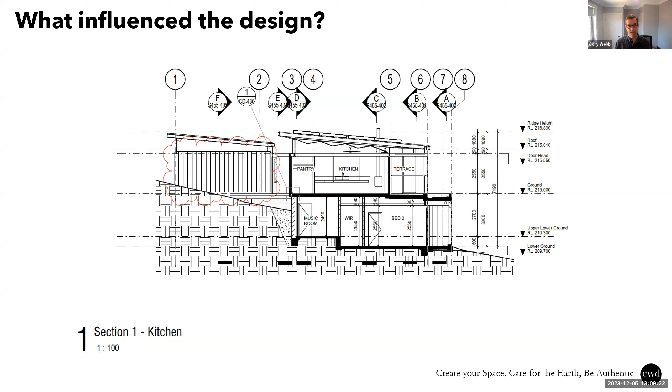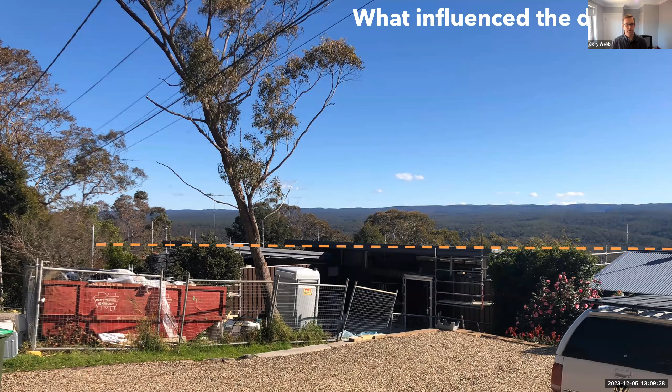There were also some planning overlays we had to contend with: a 5.5 meter height limit, and view sharing for properties across the road. Also, to fit into the context, council wanted us—and we also wanted—to make sure the house fit in the street well, so there was ability to have a good rhythm of form through the street as well.

We've used a couple of mechanisms to control that, which we'll go through in more close-up shots. Basically, I've got an oversized colonnade on the lower level with little decks and recessed doors, and then upstairs an oversized eave and pergola to give that solar protection in those areas.

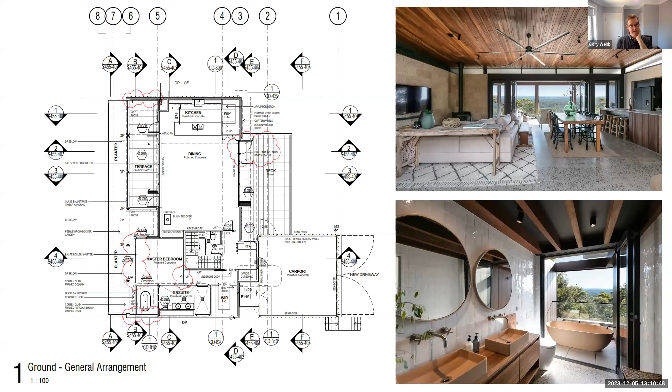In layout, we've got the entry level, or that upper ground level, that you enter through on that deck. There's a little bridge that runs over to this deck, through the front door and into the kitchen, living, dining space, with views through.

The client was really keen on having an outdoor bath, so we incorporated a sliding folding door between the ensuite and the outdoor bath, so you could fully open that ensuite up and enjoy the views out there. We really wanted to bring natural biophilic materials—timber and stone—throughout the design as well.

Downstairs, again we had the bedrooms running along this face, so they can all take advantage of the views. This image is from the guest bedroom, looking out over the pool area and the bush in the background.

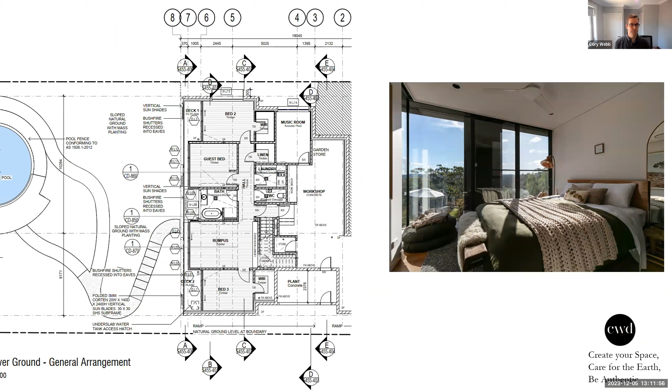In terms of style, the client really wanted something that would fit in with the natural context of the site, where the topography was sloping away from us down the site.

So we designed the house roof to have that same sort of form, so it would be synchronized with the topography and fold like a page of a book, letting in a lot of that early morning light into the main living space.

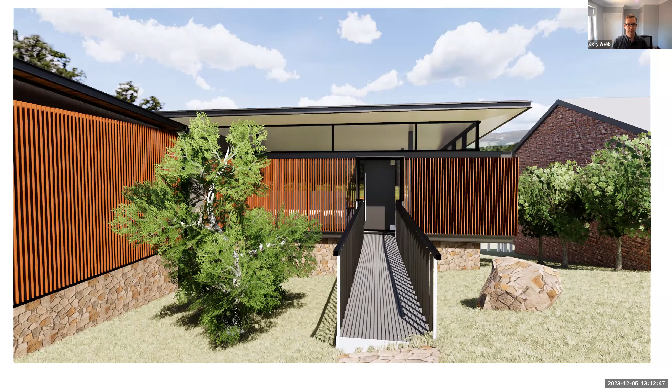In terms of materiality, we wanted the context of the forest and the stone to be reflected in the corten and stone base cladding. The finished product had these corten and sandstone finishes, so it would age gracefully.

We were also able to design the facade to fully open up on both the front and back of the house, so you could have the benefits of ventilation through there in good weather, and also generously shared that view with passersby on this quiet road. So it was quite an open house, but with very good access to views and the like.

As we said when we were looking at the topography, the form was designed to be partly submerged, and then this dominant upper level, which was really just at ground level, would look like the main thing, the main show. The roof was designed to really float above, able to capture a lot of light and warmth through the day with the amount of glass in there, connecting it with the bush as well. So that's a bit of the thinking behind the design and material choices. But now we'll dive into the bushfire design strategies.

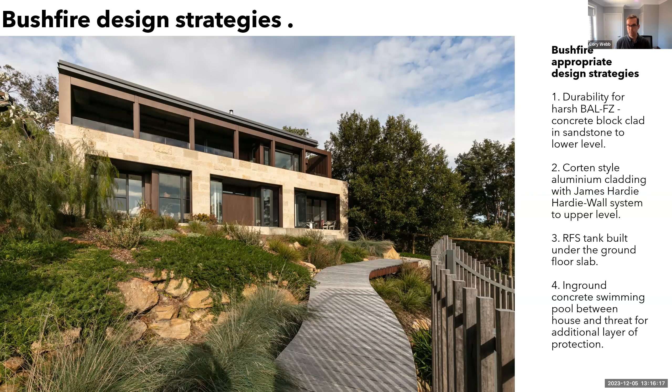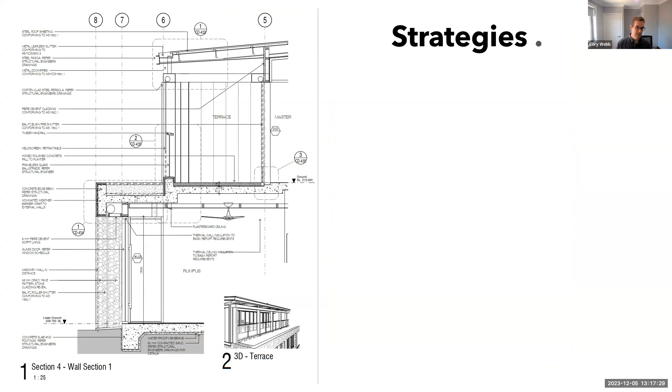In a more technical wall section through that area, you can see on the terrace level above, we boxed out this Corten pergola and had the bushfire shutters sitting inside that. Then down on the lower level, you can see the section through where the bushfire shutters are sitting in the soffit underneath the first floor slab.

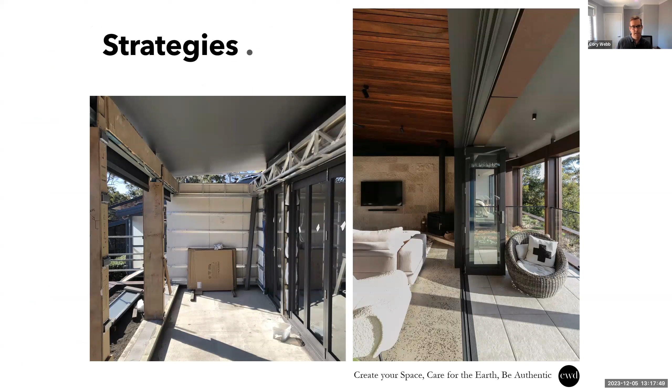So during construction, what did that look like? We had the shutters all framed up and the pergola all framed up - that's the left image - and then on the right, all clad with the aluminium Corten style cladding. Then construction shots for the soffit, where you can see the bushfire shutters have been fixed down the side of the slab, and that was concealed with fibre cement.

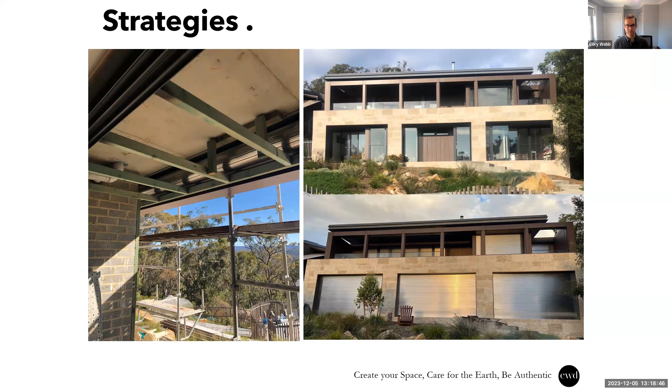One strategy to minimize costs for the client on this build was - instead of having on the lower ground level 8 different windows, some butt glass windows which are normally pretty difficult to do in flame zone, with little decks or terraces along there - instead of having individual shutters for each of those, we went for more bang for the buck and put the shutters out at the front face of that colonnade. That way we could reduce the number of bushfire shutters by 5. For the big ones, they're roughly 5 to 10 grand, so a significant cost saving there.

The roof construction we deliberately kept very simple, because complicated roof forms are very challenging in flame zone. So we've got just 2 single skillion roofs over the upper sections and some lower ones over the ensuite and kitchen.

For the construction, we used the Promatec BAL FZ tested system for the roof construction, and this has recently been bought out by, I think it's Siniat, with the weather defense product - Promat's sold it on to them. This is a really good system because the Promat, or weather defense at Siniat now, is vapor permeable and tested for BAL flame zone, so it reduced the risk of condensation, which there's been a bit of discussion about in the industry.

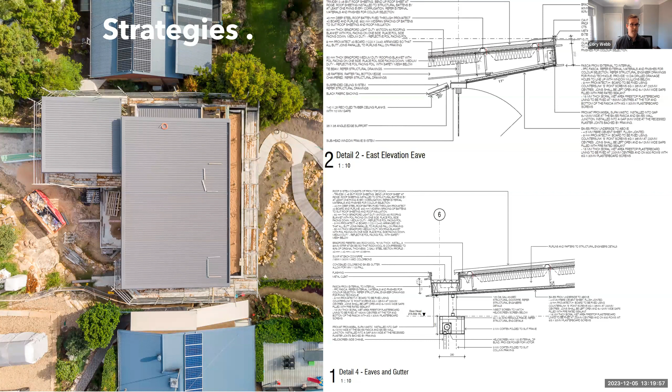Just in terms of that comment, for the condensation issues that can occur, specifically to flame zone Appendix H roofs, quite a bit of moisture can be trapped in the roof, as we can see in that top roof. I didn't use it on this system, but on all projects going forward, we're using that best practice system down the bottom with a ventilated sarking zone to allow the air to flow out. That's possible with the detail that Mark Davis has shared with the BDAA.

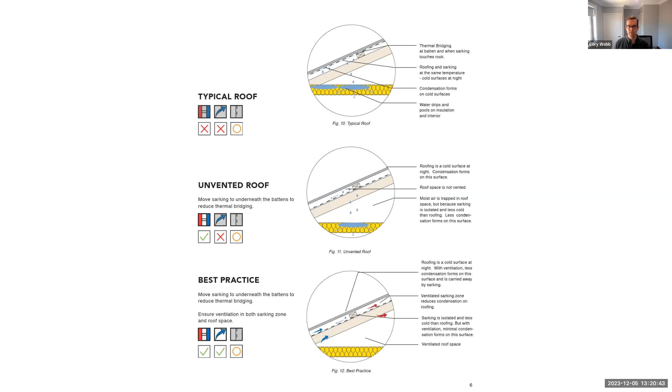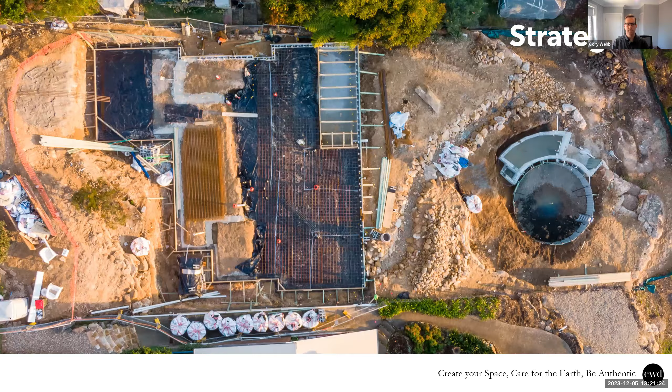For the landscape design, we designed the property to have non-combustible landscaping elements within 6 meters of the house. We've got concrete steps at the back, and around the pool, for less necessary paths we were able to change it over to timber. There was a dry creek bed in the backyard, able to filter the stormwater from the roof.

And then through a system there to filter it all out. We also used a lot of very low native planting, so that there isn't fire sources right next to the building. That was an important part of it, and at a recent bushfire conference it was drummed into everyone to pass on: instead of putting plants against your buildings in bushfire areas, encourage everybody to have a non-combustible path basically around your house.

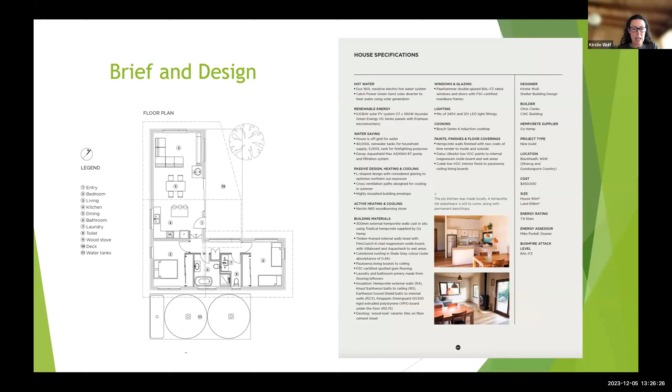It's in a very high bushfire area. And the brief was for a small house, solar passive, high insulation, using natural materials as much as possible. Unfortunately, north is sort of to the front corner, and that's how we've sort of ended up with an L-shaped design with a deck which can capture the sun in winter.

So in terms of that, having a look at it, what is hempcrete? So not a lot of people have come across this, and it's really a fantastic material to use in high bushfire areas, and for many other reasons, but one of them is it's non-combustible. But basically what it is, it's made from the hemp hurds which are the inside of the hemp stalk, and it's mixed together with a lime-based binder. It's usually poured into a formwork on site, although you can now get hemp blocks, and they also could do spray installation. It is non-load bearing, so inside the middle of the wall there is actually a timber frame. We'll have a look at that.

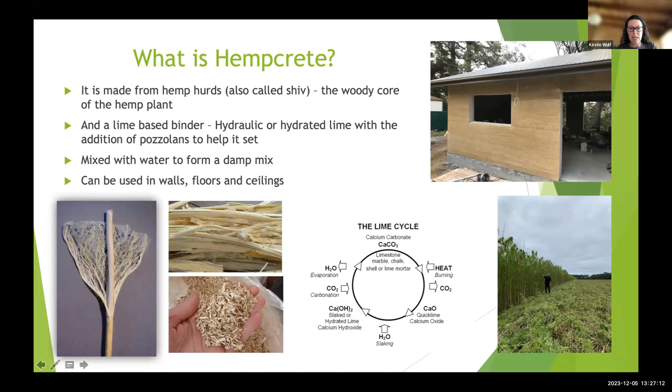But in terms of that, where did hempcrete come from? Basically, it started in France in the late 1980s, where they were wanting to retrofit these wonderful half-timbered houses from the 15th and 16th century. Now, when they used non-vapor permeable materials like concrete, they actually came up with problems of the buildings rotting. But they also needed to try and bring these buildings up to European thermal standards, and needed a material that was well insulating, but was also vapor permeable.

Why didn't we build in Australia with it earlier? Well, part of the reason is that it wasn't legal to grow hemp. New South Wales was one of the first states in Australia, and in 2008 it became legal to grow industrial hemp. You might wonder what the difference between industrial hemp and marijuana is: industrial hemp has a low THC content, and that actually needs to be measured. So there are no psychoactive properties in the industrial hemp.

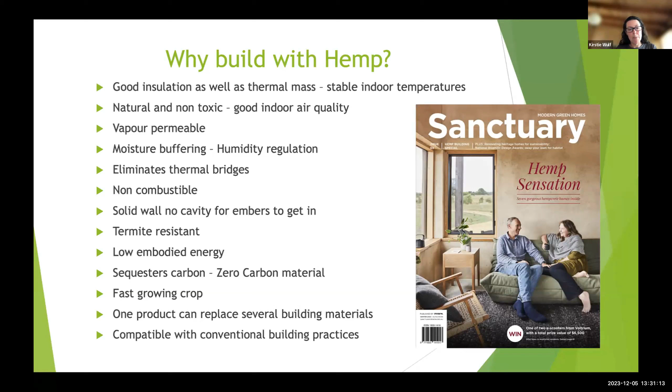So also, hemp is a very fast growing crop, growing in 3 to 4 months. Compare that to even the fastest growing timbers taking 20 to 25 years. So what that means is that the carbon which is in that material can be locked up in that material, and then once it's in your wall, it stays there. So even taking into account the energy and CO2 in the lime-based binder, it's actually a zero carbon building material, also very low in embodied energy. So a couple other great things: it's quite compatible with conventional building practices, a lot more so than many of the other natural building products.

The hemp is then mixed in a flat pan mixer with water and a lime-based binder, placed into the formwork. It is tamped down. It is not rammed down, because you don't want to push all the air out. You just want to have the particles interlocked with each other so that they hold in place.

The other great thing from a construction point of view is that all the services are put in the walls first prior to the pouring of the hemp, which makes it quite easy, although you need to make sure that you have a good electrical and plumbing plan so you know where everything's going to go.

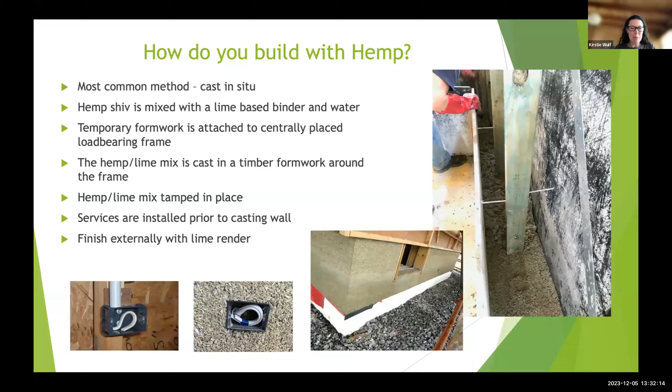So at the property at Blackheath, the owners actually cast the walls themselves. So here they are working on the site. The big green thing is the mixer where it was all mixed up. They also did some fantastic details. They wanted the thick walls, which in this case are 300 thick, and that was largely for better insulation because Blackheath is quite a cold area.

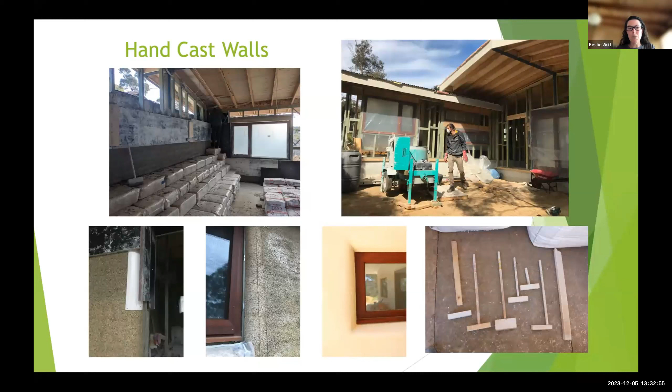But they did this wonderful curved formwork around the windows using quarter plumbing pipe, which you can see when it was rendered gives a really lovely finish there.

So on the Blackheath house, the hempcrete was installed what they call cast in situ, but hempcrete can also be used as hemp blocks. So they're preformed and are effectively glued together. You still need a structural frame for that, whether that frame is timber, steel or concrete. Also, hempcrete can be spray installed for faster installation.

Popular in Europe is also hemp insulation batts. We're not manufacturing those here in Australia, but there are a number of companies working on that. So hopefully we will have that product available in the future.

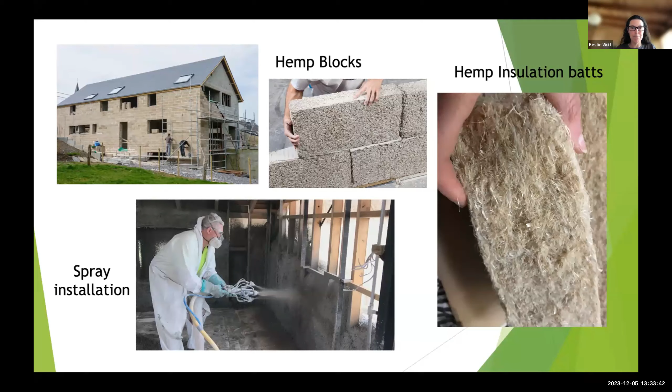So in terms of the hempcrete wall construction, as I described earlier, the frame is located in the middle of the wall, which is great, protecting your frame from both fire and termites. And then on the outside, there is usually a render finish. Those renders need to be vapor permeable because the wall is vapor permeable. On the inside, you can either leave it unrendered and finish it with a vapor permeable finish, or you can also render it on the inside with either clay or lime.

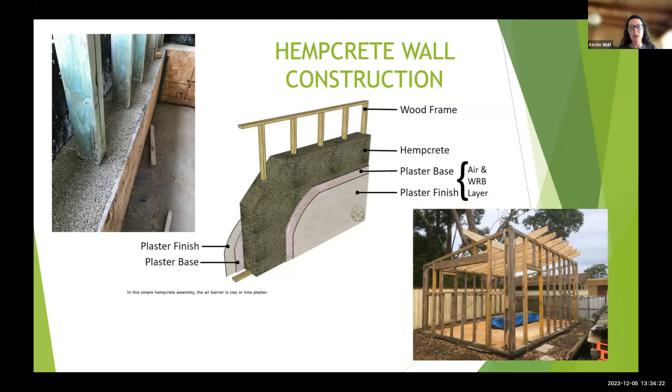So there are a number of products on the Australian market. I've just picked out two of the more popular ones and looked at what they have done in terms of their fire testing. So the first one is the Tradical hempcrete, which is distributed in Australia by Oz Hemp. A 300mm thick wall will get you a 60-minute fire rating, which is more than enough for BAL-FZ. BAL-FZ only requires a 30-minute fire rating, and they have that CodeMark certified, so that can be used for BAL-FZ.

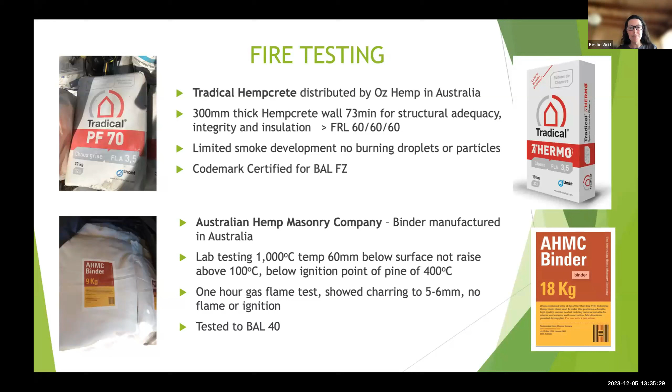The Australian Hemp Masonry Company, that is a binder that's manufactured in Australia. They've only had theirs tested to BAL-40 so far, but I have no doubt that when they do test it for BAL-FZ it will comply, because certainly the hempcrete can withstand significant temperatures without either igniting or spreading any fire.

So during my own half-hour fire test on a hempcrete block, and it was an unrendered block, because if you render it, it gives it even more fire protection, there was absolutely no flaming. It certainly did have some charring of the outside, but even at the end of that test, I could put my hand behind that 100mm hempcrete block and only feel a tiny bit of warmth.

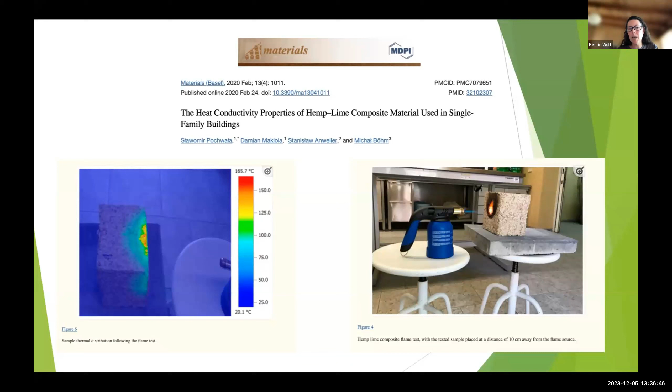And that's one of the real benefits of hempcrete. Not only is it non-combustible, but it provides you really good insulation if you are in a bushfire situation, because you need to be protected not just from fire ignition, but also from that radiant heat.

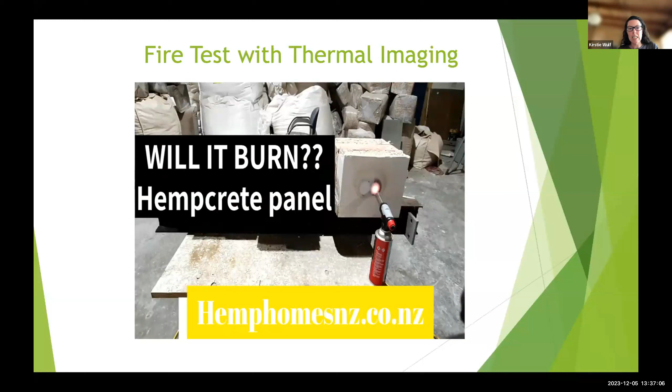Let's see if this video will work. Oh, here we go. It's only quick. The relevant thing I wanted to show in relation to this video: this is actually a rendered panel. But here they go. This is using a thermal camera.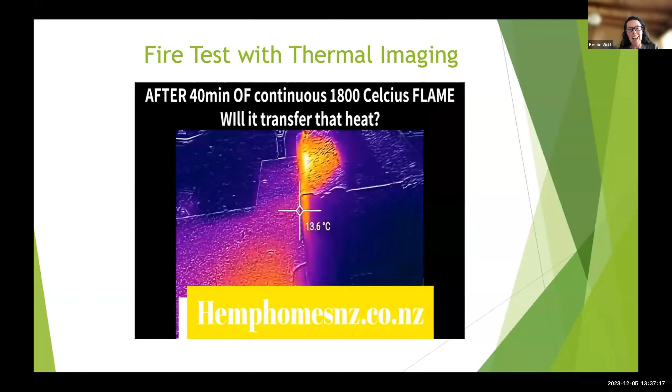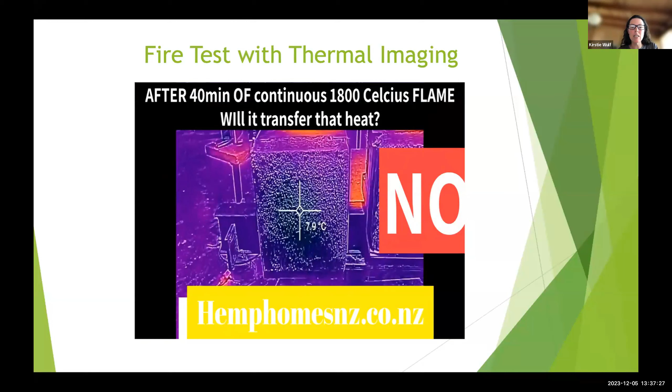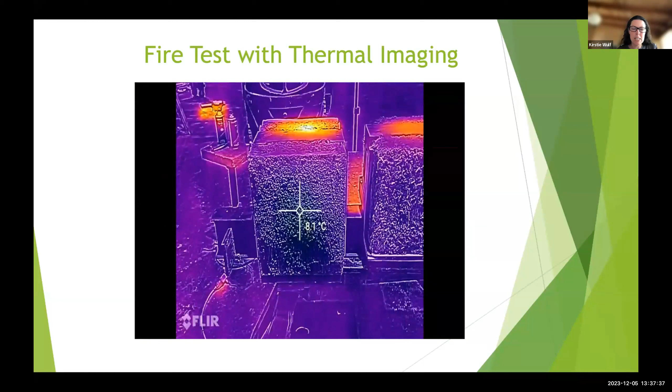Although the person who did this test actually showed me that the camera only went up to 120 degrees. So at the front, it was probably a lot hotter than 120 degrees. But as you can see, it's showing about 8 degrees at the back of that block, even though it was significantly hotter at the front. So that's the benefits of protecting from radiant heat as well as from flame ignition.

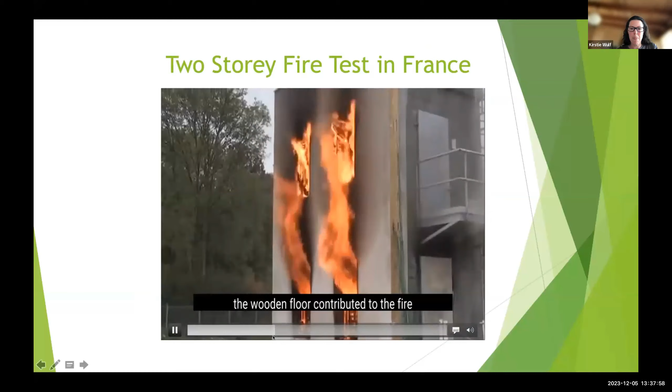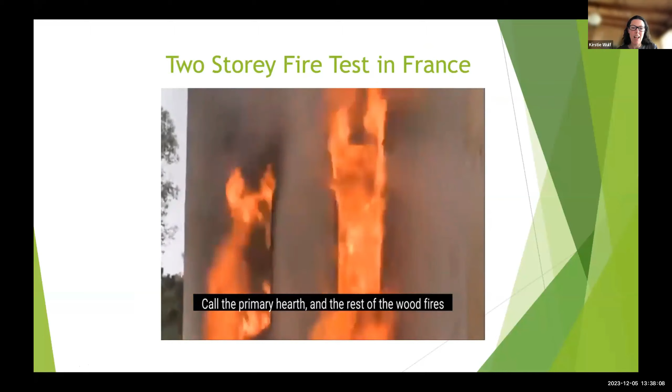Sorry, and this is actually, they also did a full 2-story fire test in France. So this is a much larger scale test. In this particular one, they had timber windows and they also had a timber first floor. The timber windows burnt out, but no issue with the wall.

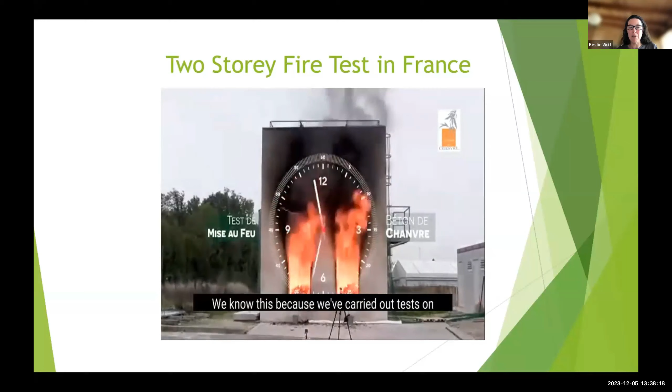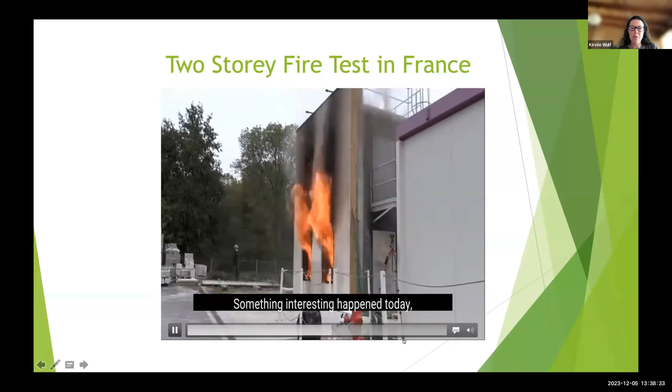You can see actually how large the timber cribs they put in there were, which is certainly larger than the ones they use for BAL-FZ testing in Australia. But even after 2 hours, there was no ignition. So that goes to show just how fireproof the hempcrete can be.

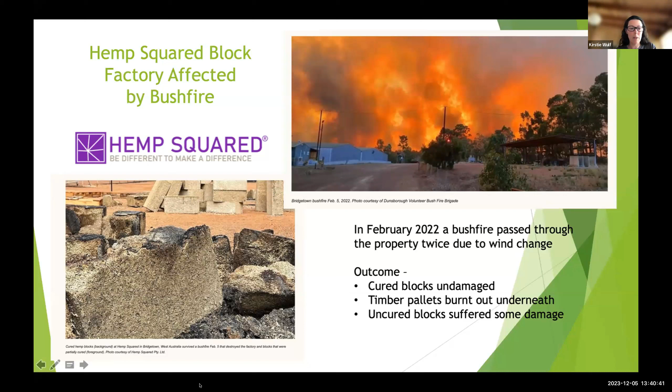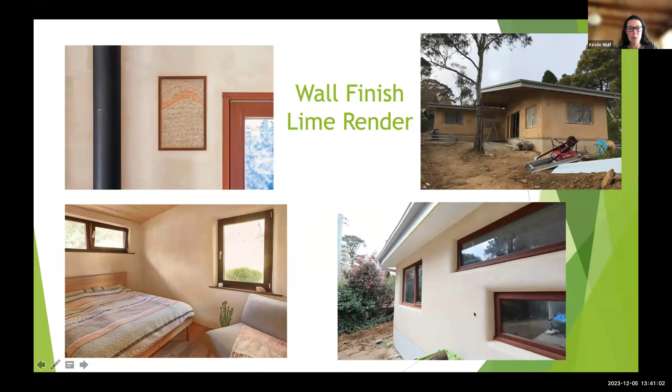So generally, the hempcrete walls are finished with a lime render, which provides even more fire protection. Here are some pictures of the house at Blackheath with the first coat of render and then with the second coat of render, and those absolutely beautiful window reveals and lovely soft lime render finish.

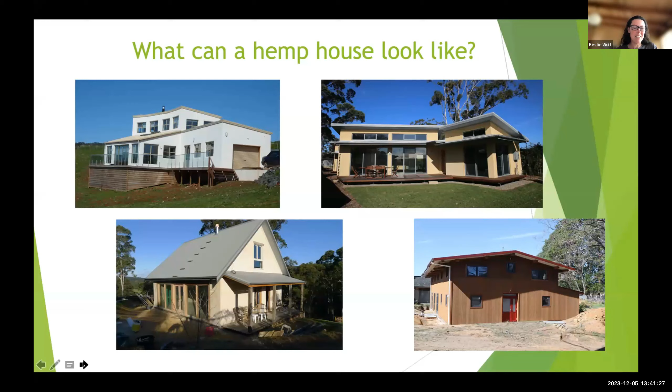In terms of what a hempcrete house can look like, it can look like anything. The hempcrete will take the form of the formwork. So you can go from traditional to contemporary, you can clad it, not really suitable in a high bushfire area, but certainly a possibility.

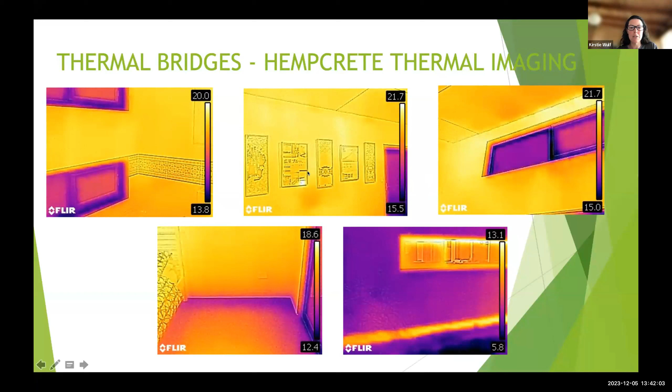Just looking at the thermal bridges in the hempcrete wall, this is my first hempcrete house that I built for myself. I learned a few lessons there. In those corners, you can see absolutely no thermal bridging. My double glazed windows, clearly I'm losing quite a lot of heat through those aluminium frames. Lesson learnt there. Didn't have slab edge insulation, and I can absolutely see the heat coming out through the slab. But in terms of the walls themselves, really fantastic, showing even temperature, no thermal bridges, good insulation.

And yes, if you're interested in further reading about hempcrete, there's some fantastic resources for you.